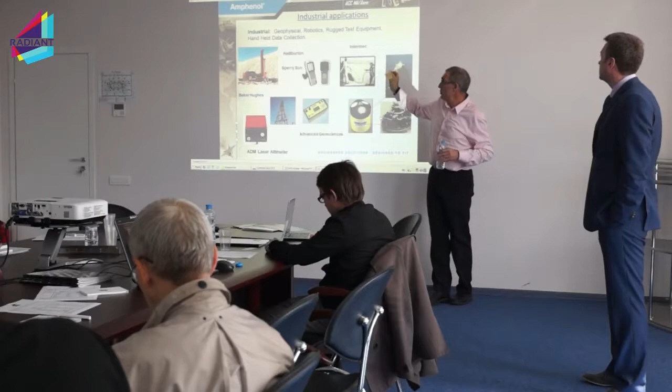Getting down to the size, one of the connectors I sent out here is very, very small—four contacts, but we make these for industrial applications.

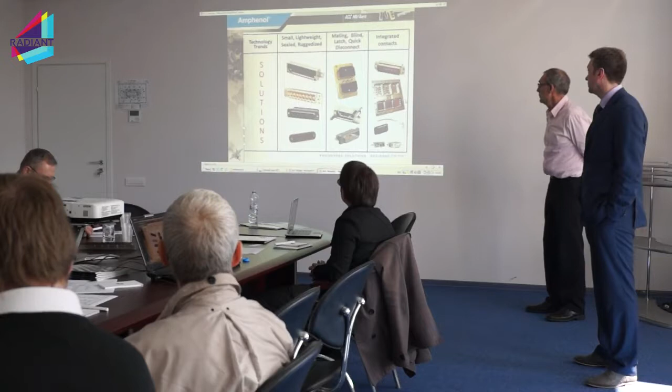This is MMA? This is R39. Okay.

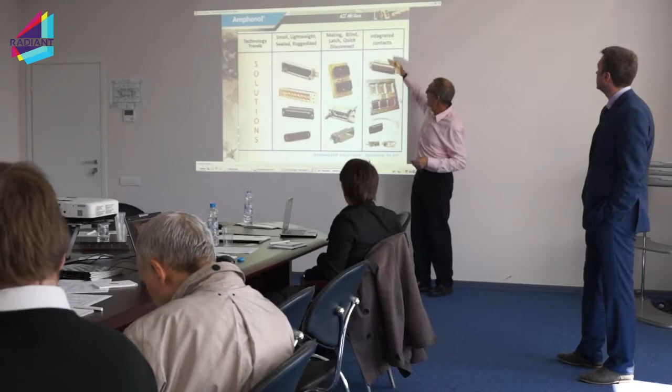So then there are different customers that wanted blind mating and quick disconnect packages, so you can actually latch connectors together. We can do that too. And then they want integrated contacts, meaning 5 signal, 10 power. So you can actually have different types of contact arrangements in each insert. The inserts themselves have thousands of different insert patterns, and what you do is just pick them and populate them into the arrangement. Standard inserts, you pop them into an R27 or a 600, you just take the inserts and arrange them.

This is R39, original. No, this would have been similar to MMA. Embraer wanted R39 with blind mating. Sorry, it wasn't R39 that they took, it was MMA connectors that I was talking about before.

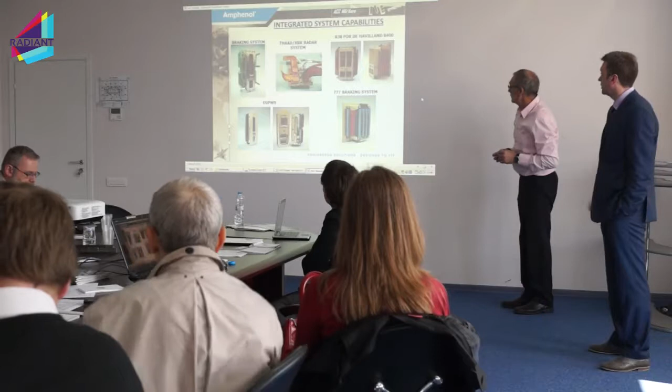So I wanted—you were saying, can you show me some samples of different ones? Here's some samples. I've used these, these are unique designs for different customers.

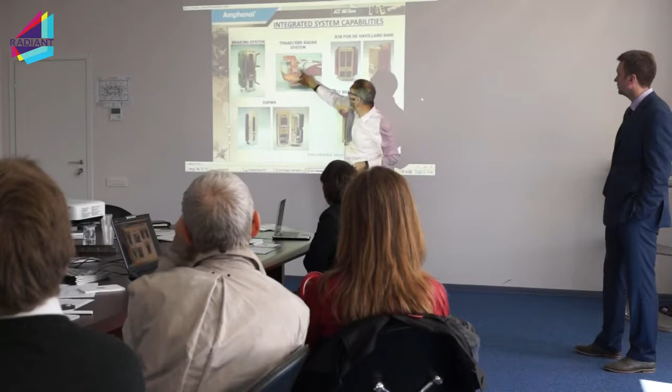This is a braking system, most likely a Bombardier. You can see it's the size of one ARINC. This is the one I showed you the picture of, that THAAD missile program, where I said ARINCs are on that radar system. You can see how they've brought flex out, cable on the other side, for that radar application.

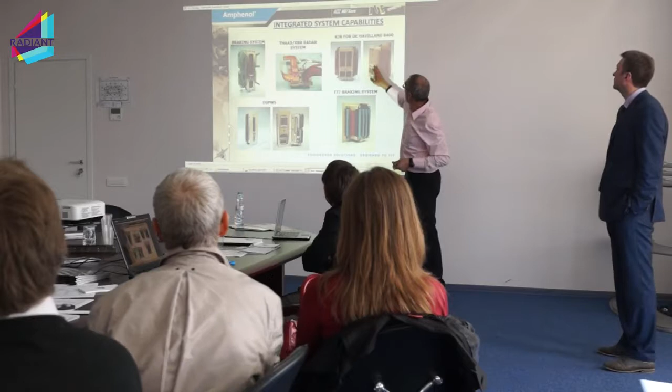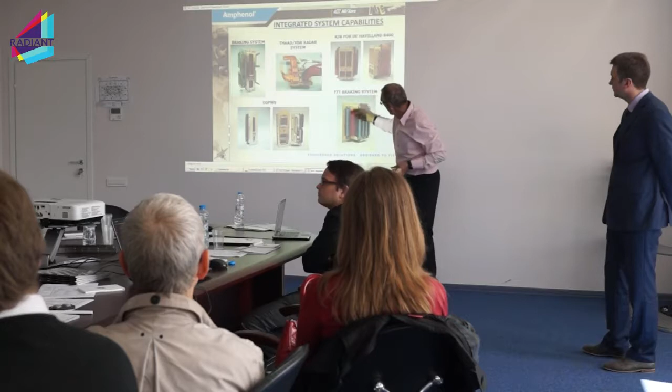This is the Bombardier, the de Havilland, kind of shows you it's a braking system. It has an ARINC, and to get to the box they have flex coming to an interface board in the back. These are flex assemblies coming on the back of the connector. This is a 777 braking system with interface cards slotted to the back.

Okay, EGPWS, which is enhanced ground proximity warning system. You can see how we've taken the ARINCs and designed it into the ARINCs with a board in the back for interfacing. So it kind of shows you some different designs that customers have come up with for their applications.

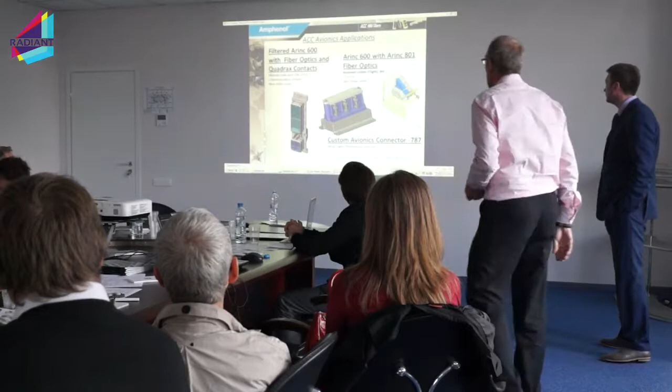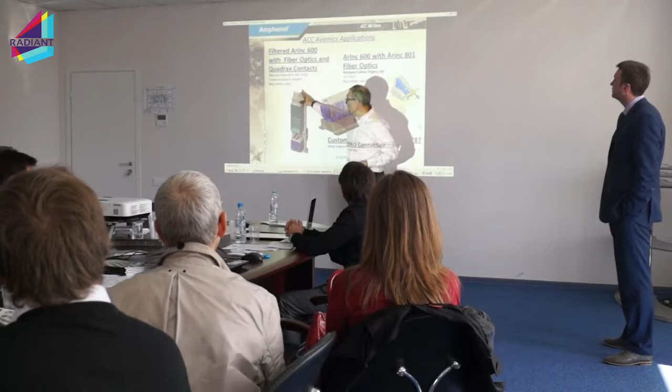So basically with the fiber optics, we can do anybody's fiber optics. Amphenol owns Times, and we have Socapex, which manufacture fiber optics. So we design our inserts so they can clip in and accept the fiber optics for mating purposes. So we have all the different inserts available for fiber optics, Quadrax, Twinax, transitional equipment. So this is an example for Rockwell.

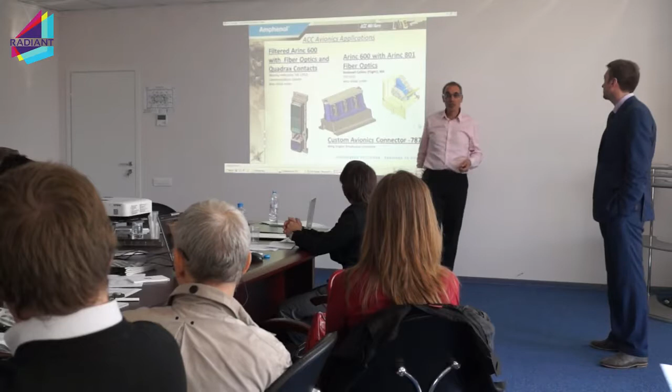This is a unique one. This is actually for the 777, 787, and shows you what we get into designing with Boeing. This is actually for a wing assembly. This is a connector, so if the engine's on fire, this is a tearaway connector that pops off the engine. So this was designed up. Every 787 has a connector we call the green monster on it. If the engine catches fire, it disconnects from the aircraft, from the frame. It's kind of a unique example.

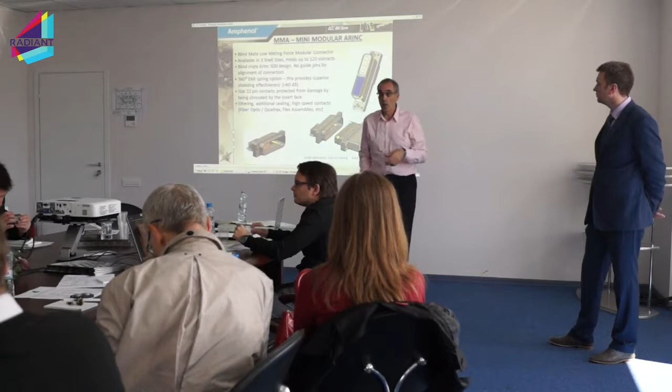You saw that picture of the ARINC with the flex assembly on the back of it. With ARINCs, typically you have to interface to your card. In other words, you have to put an interface board because you can't bring the connector right to the card. So we have a product that we call the mini modular ARINC. It takes the same insert arrangements in an ARINC size 1 connector, so all the different arrangements that are available in the market for a size 1 connector.

So I'm kind of sending that around, just a couple samples. In a size 1, ARINC size 1 connector, you have a power and signal. Those inserts we use those in a smaller package. Okay?

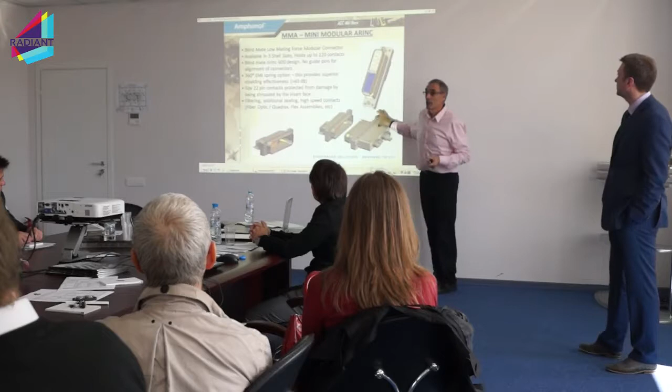It has the same features. It has a ground spring. The biggest difference between this and that big ARINC is the board side is right angled, right? So now you eliminate having to have a board or a flex assembly. You can mount these right to the PC board.

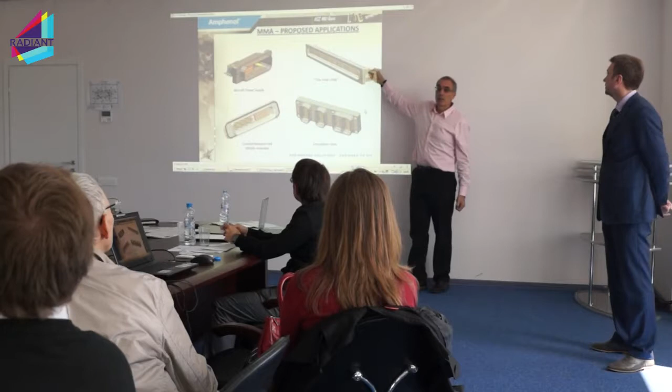This is just some of the designs that have been proposed. This is actually bought by Mitsubishi in Japan. They're using it on one of, oh my God, what was it being used on? One of the electronics boards, and they just rack this whole thing with MMA onto their box. You can see how thin their slot is for their box. So this is a Mitsubishi application, could be Honda, Honda Jet most likely, but that's an application we've done for Mitsubishi. This one is actually for Dassault, which is for an Airbus application.

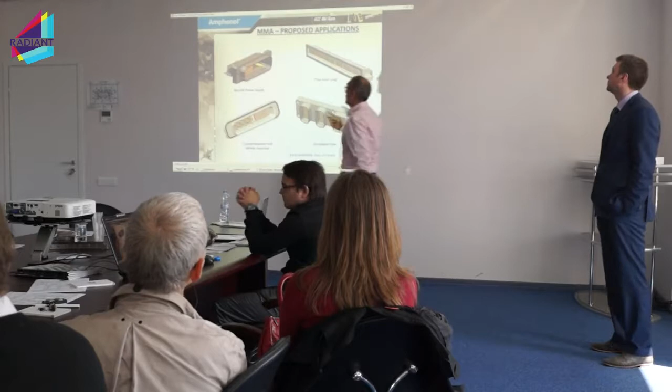The second was which one? Oh, sorry. The second one? Which one? How?

Which one? Oh, this power unit is for Dassault in Europe. It's a box manufacturer that does power units for Airbus. So this one's for that particular one.

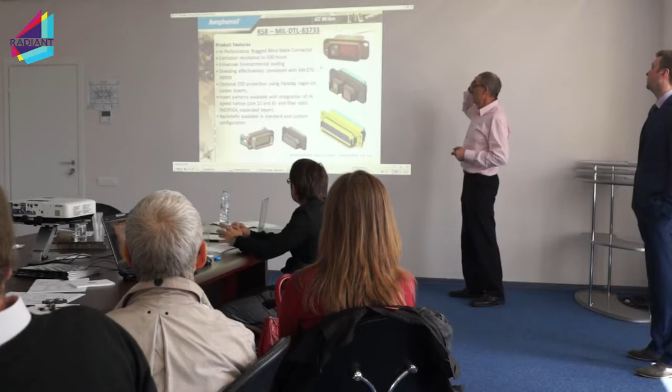And high corrosion resistance, 500 hours.

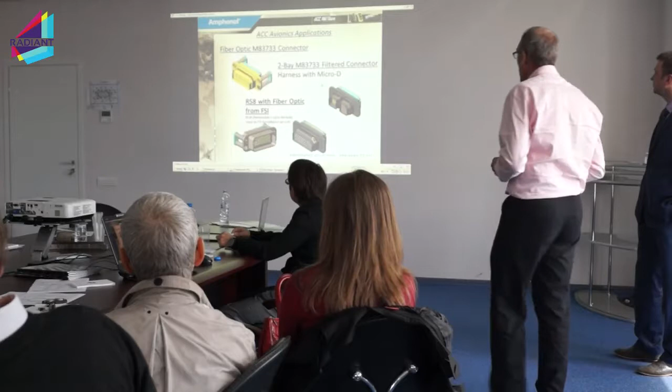Fiber optics. Some fighter aircraft uses P3. One was the example for the Turkey aircraft where they wanted sealing between the cabin and outside. They had a box on the outside of the aircraft, and they were looking at this particular connector. Was its sealing level enough to stop it from getting into the cockpit area?

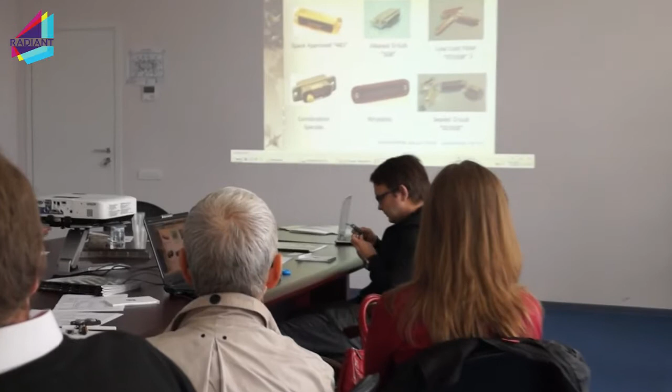So for space, that particular one I'm sending around has, that's gold plated. So for space applications, the materials we use because of corrosion resistance is typically gold plated. And for space applications, gold plated, they're programmable. So they're called tubular filters. I don't have it. They're inside there. They're called tubular filters, and you can set the value of capacitance for filtering.

In other words, each contact has a different value, so you can filter for noise. Some you can pass through. We have something called 308s, which are slightly different contacts, less filtering. And then we have a low-cost version, which is just a planar, and another low-cost. So we have different levels of filtering.

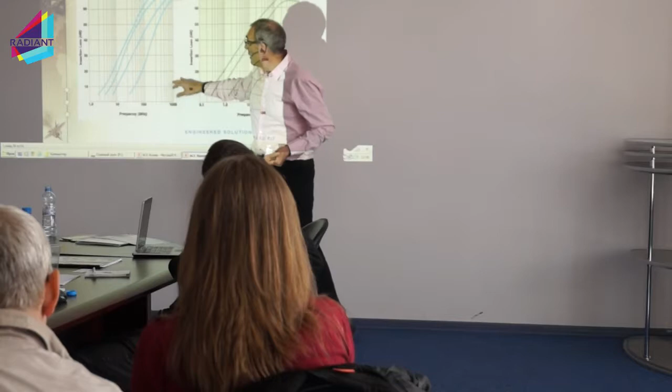Kind of example for filtering, what you have is that you have different levels you can filter in designs. You have a pi filter, you have a C filter, a T filter using inductors. And basically what you're doing is eliminating a high frequency. So the capacitors chop off the filtering levels. Okay, so this just shows you what level each of these pi filters and what frequency they hit to reduce the noise going through. So noise is basically high frequency. So with a capacitor, your capacitance level affects the frequency and chops it off.

So when you have a capacitor in a circuit with a resistor, what you end up doing is smoothing out the frequency, chopping out the high frequencies. This is for noise. If you were doing a lightning strike, you're not filtering with the capacitor, you're using diodes, Zener diodes. So in that case, you're chopping off the amplitude of the spike, all right? So there's a difference between filtering for suppression, for noise, and filtering for lightning strike. So there's a combination in the design for filtering.

There is a catalog here, right there, and it shows you in more detail if you have an issue for noise, and typically aircraft, don't kid yourself, there's a lot of outside lightning strikes, depending where the box is, could be boxes in landing gear areas, and you've got to filter. If you go box to box, having a cable box to box, that cable will pick up EMI. So you've got to filter your two boxes, okay? Or have filtering in the boxes.

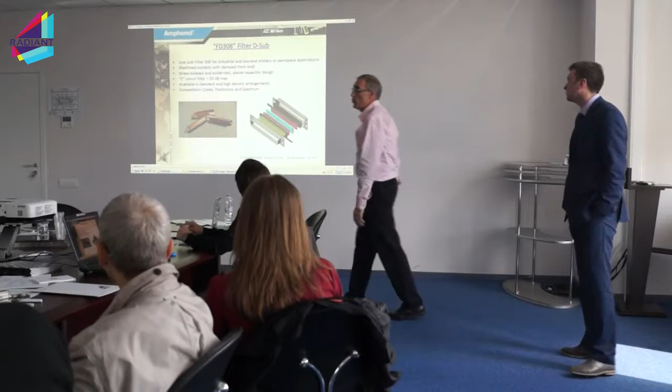Michael, the question is regarding the connectors with diodes. Sorry, which connectors are diodes? With diodes, yes, to cut the... The connectors we do for diode are typically 38999 with diode protection for military aircraft, for lightning strikes.

If we compare the dimensions of a standard connector and a connector with a diode? It's probably about 3/4 of an inch more on the back. So in other words, you're extending the back of your connector, and typically it's all wired up with a cable assembly. It adds probably about that much. Millimeters or inches? It's very minimal. That's 3 centimeters? Roughly 3 centimeters on the back.

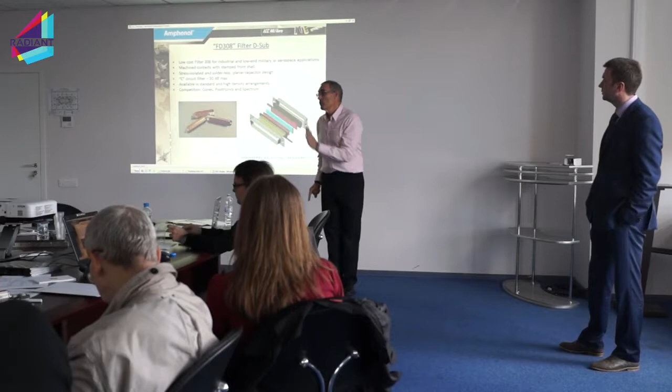So again, you asked the question because there's different levels of lightning strikes within the code. There's like level 1, level 2, level 3, how severe that they're looking for. So the types of diodes and the amount of room they take up in the space will depend on the level of the lightning strike. And there are specs determining what level you want to filter.

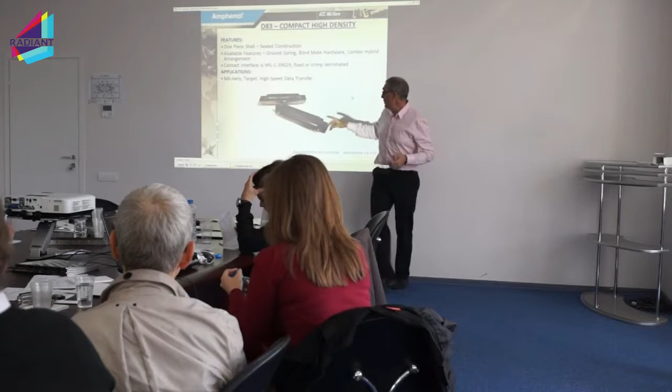...utilizes a D-sub contact. So you have more mass in a D-sub instead of a micro-D contact. And also spacing arrangements. But the face imprint of this is a format of micro-D. So you're putting larger contacts inside their arrangement. By doing this, you increase the speed, the data rates that you can get through the contacts. So that's another way when we talk about speed. By changing the type of contacts, whether it's even an RF contact or differential pair micro-D contact, you can put a D-sub contact in here and actually get higher data rates by using different types of contacts, using the same interface.

But again, with those high-speed applications, you've got to make sure that you eliminate noise, and that your grounding is effective. Otherwise, if you pick up noise for high-speed applications, you're in trouble. You're pushing so many pulses of data rates through it, so noise will affect the information you're getting on the other side. So this application was specifically for DRS for a flex assembly within the computer itself.

Michael, could you please return to the previous slide?

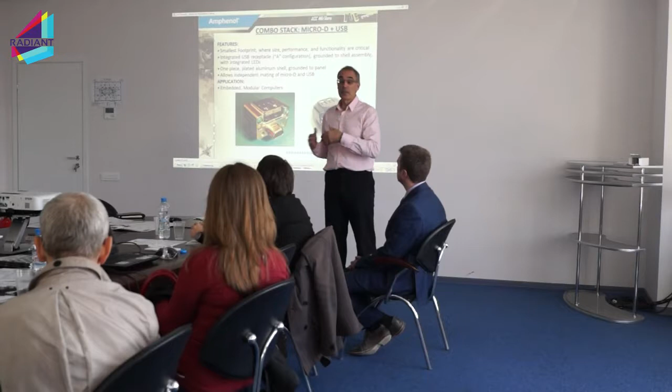What we're doing, I can't show you but I will talk about it - new product development. For Amphenol, people want lower cost, so the next design of contacts for ARINC connectors are currently machined contacts, which are very costly to build. In a connector, 70-80% of the price is the contacts. We're changing the contact design within ARINC to meet spec, but stamped and formed instead, so contact cost can drop 60%. So the next step is designing lower cost contacts for ARINC products, further cost reduction for customers. That's something I can't show you because it's still being worked on. That's one way we're reducing cost within the ARINC products themselves, besides going plastic and other materials.